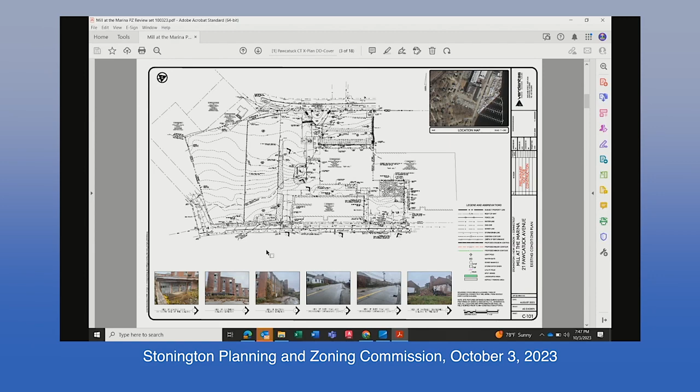So this is just the overall existing conditions plan, with a few pictures highlighting the existing structure. I think the aerials did it justice. But moving on to this proposed site layout.

As I mentioned, one of the big things that changed recently following our last discussion was that we provided the commercial space that Mr. Seeger mentioned, over in this area. This also includes the proposed location for the transformer. We're working with an MEP to coordinate on utilities making their way into the building, but as of now we're looking at our utility rooms being on the lower level over here.

So our utility corridor is going to access through River Road. We're currently working with local utility companies as well as providers to figure out loading and proper sizing of this. That's going to be part of, as Mark mentioned, our site plan review process and application.

This commercial space is also going to utilize the green space in this area to provide stormwater detention, which will further be designed once we get more information about the soil in the area. We're going to do advancement of soil borings, figure out the percolation rates, and determine correct sizing based on the hydrologic soils located in this area. You'll see this is the similar layout to the last presentation.

One thing to note about this area is that this is basically providing a phase 1 and phase 2 of our application. Phase 1 is going to essentially focus strictly on the parking within the actual area. I'd like to go back to the aerial to show this aerial in the bottom right, which shows exactly what I'm mentioning. Our phase 1 parking is going to just utilize this existing area, and then you'll see this landscape portion over here, and this impervious area as well.

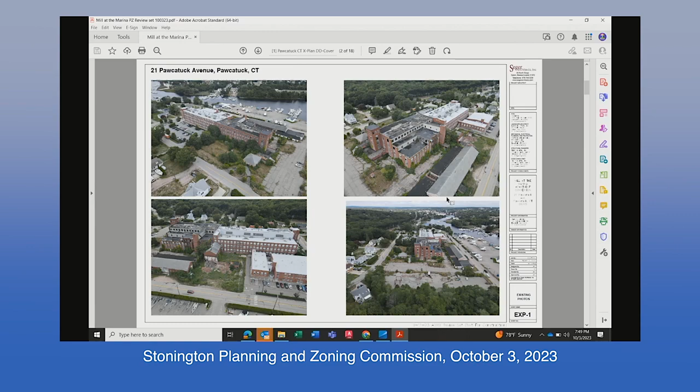That impervious area is going to be designed and presented to the board at a later date, once Jonathan figures out exactly how he's going to proceed moving forward. We're demonstrating what that second phase would be in this plan, just so the commission and the board are in full agreement of what we're actually planning on doing.

We are currently evaluating all the grades at the site. It's a very steep site. I'm not sure if many have been out there, but specifically it's steep along the entrance coming down to River Road, and very steep in this courtyard area. Our landscape architect, Chris McFarland, and I are working on the grades right now to make sure we're able to prepare the site and propose proper grades in this area so that we're able to use all the amenities I'll discuss right now.

So as you can see, I can speak to the landscape side of things, but I am not a landscape architect. Chris is not here today, but if we do have any questions, we'll try to answer them as best as we can. If there are further questions, we can obviously provide responses to the board as needed.

As I mentioned, we're basically providing a walking area along here. This currently is all impervious, all pavement right now, so it's also a benefit in terms of stormwater runoff. The amount of green space we're proposing is greater than what's already there now, so there's going to be a reduction in runoff for stormwater management.

In addition, we're going to better utilize this landscaped area along Pawcatuck Ave. I do want to note this is still subject to change. We are going to be evaluating the soil in this area, so there's potential for some contamination. We're not anticipating contamination up in this area as much because the mill is down gradient. But I do want to mention that all of these proposed site layouts are subject to change following the environmental assessment reporting.

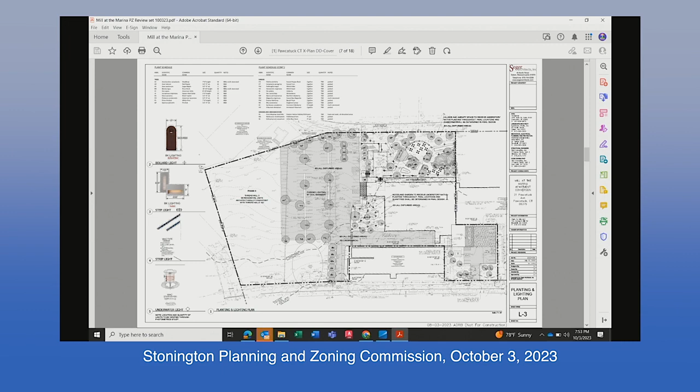These, I believe, are the retaining walls. Again, these are potentially subject to change following the grades being finalized, but Mr. McFarland did provide these details for presentation purposes. And with that, I am going to drop it back over to Mr. Seeger for architectural.

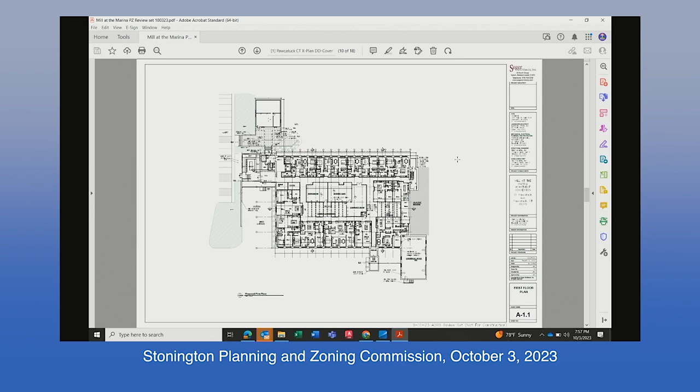We do a number of projects working with Epsilon Historic Tax Consultant, and we go through the process of applying for both federal tax credits as well as state tax credits. So we're familiar with the guidelines. Essentially, they want you to restore the building as best as what the original building was. So that's what we'll be doing with the entire building.

Replacing all the windows, we have to match all the mullions as well as the frames, as well as restoring all the brickwork. But this elevation is facing the marina, or facing the Pawcatuck River, and this is where we're introducing a couple garage doors to get to the parking below. And up top here is the parking lot with a new entrance.

We are proposing sort of a glass atrium entrance to emphasize where people should go. It's a little modern industrial look, sort of a component to the building, one of the few things that we're adding. And then this is the canopy I was talking about that can connect to the single-story building, but more importantly acts sort of as a passage to the Great Lawn, or the landscape amenity space. And this is actually the elevation facing the lawn area.

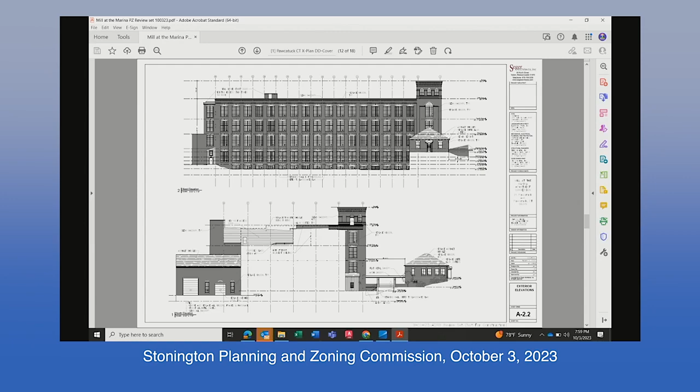And the elevation below here is actually looking south, but this is the existing Thread Mill 1 building in front of us, and we're just showing the commercial space. Again, we have to submit for replacing metal doors and all the brick restoration and window replacement, as well as the roof, for the historic tax credits.

But I think the renderings really tell the biggest picture, you know, as far as, in fact, I could have just shown those tonight and we could have been done. But no, I think it's just really great being able to have a 3D tool.

This view is actually that same view from the photograph of the single-story building and the brick tower. The landscape area would be over here, and the entrance is right there. So this is a straight-on view of the main entrance and the pass-through, and the grade slopes down to the back, to the lower garage area.

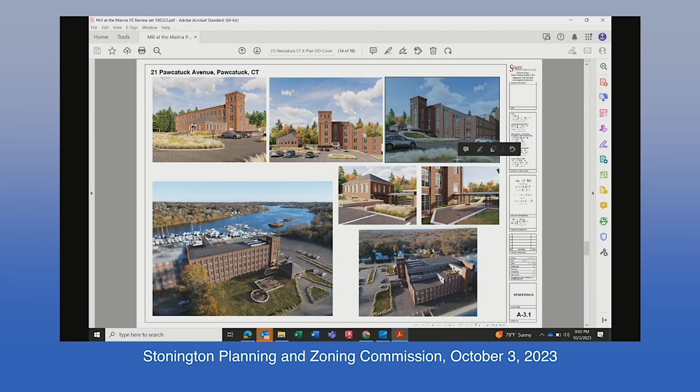But overall, I think this is a really exciting project for us. We have many opportunities with restoring the building and actually providing some good landscaping for the site and for the tenants for the building. I think I can probably pass it off to Mark if you want, or we can open it up for questions.

Pursuant to the chairman's instructions, we want to open it up to questions. I didn't know, for your convenience, if you wanted Mr. DiNardo and Mr. Seeger to sit here so that if you had a specific question, they don't have to come all the way up. Is that okay? Fine with us, make yourselves comfortable. All right, gentlemen, have a seat.

Does the board have any questions of the presenters? Commissioner Philbrick? Thank you.

I'm still confused about Phase 1, Phase 2, Thread Mill 2, Thread Mill 3. If this is a master plan, and you have a big section delineated for Thread Mill 3 in Phase 2, is that a different master plan? Is that incorporated in this? I'm totally confused on the master plan versus all these different phases and thread mills.

Well, like any smart lawyer, I'd defer to the planner first for his explanation before I would weigh in on that, because he addresses that in his report. He points out - oh, I'm sorry, go ahead. Can you clarify that for me, Clifton? I can try my best.

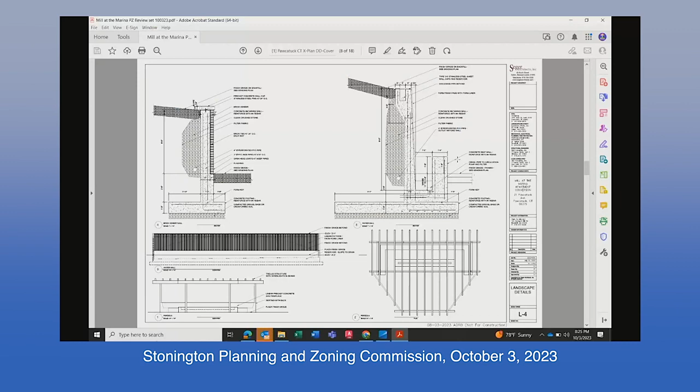We're replacing the windows in their entirety, so that includes the frames, the blocking, all the casing. So you're going to replicate the windows that were there? Yeah, we actually provided a window package for the historic tax credits.

That's Jonathan - that's perfect, that's just what I wanted to see. Yeah, Jonathan went in and had everything documented, so we have to actually replicate them. They're going to be external and internal muntins, the grids and all. Actually, they're metal windows - we're not doing wood windows.

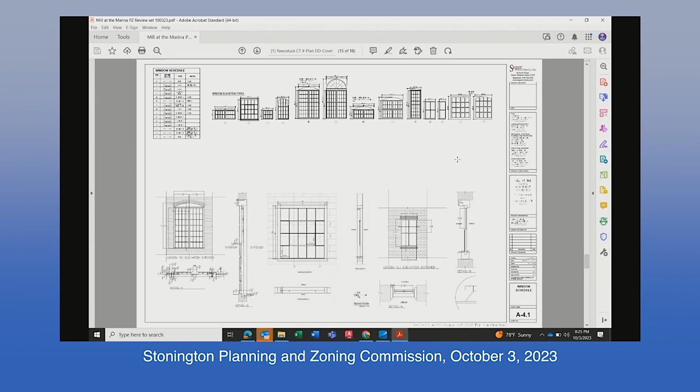The metal windows are allowed because they're painted anyway. Okay, but they're top of the line - even the arches, every type of window we're duplicating. Thank you, that's the extent of my questions.

Gary, any questions? The last time you were here, I think you had mentioned the small parcel or building was owned by someone else. Oh yeah, I wanted to talk about that, if that's okay. If we could put the map showing the site plan again.

When we spoke initially at our workshop - is that this one? Yeah, that's fine. The building that fronts on River Road is owned by the Norwest Marina, which recently changed ownership. So we've been in discussion with them about that building - not very fruitful discussions - but it's also something that they have plans to make improvements to.

Their marina, and those plans are in some fashion going to include that 18,000 square foot warehouse. What they're going to do with it, how they're going to accomplish that, I don't know, but certainly as we present our proposal, it will have some connection with what they will be coming before you with. So you'll have an opportunity to get their input on that. Right now, we don't have any control over it.

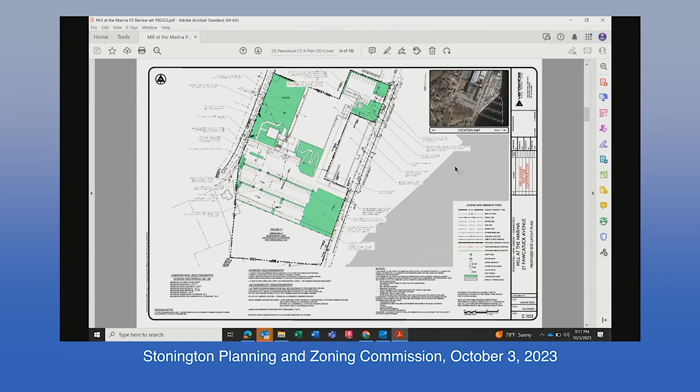Now, my attempt to answer some of the questions. First of all, I think everybody in the room recognizes the history of the building and the abuses that have taken place to the building and also to the town's enforcement. There is currently, as the planner's report notes, a $295,000 blight fine that has been in existence for years. There's currently a lawsuit by the town to assess the damages they incurred securing the building. So I'm not surprised someone had lights flashing into their house. I'm not surprised someone was not being honored by a variance requiring a buffer. It was lawlessness. So when we got involved in the project, we took all of that on, and obviously we took on the mistrust of the neighbors who, like the town, had been subject to this conduct.

So I appreciate and respect the fact that you are well-warranted in your concerns, and that we inherited the predecessor's use and abuse of the property. So with that said, let me try to address some of the questions you raised, particularly Mr. Dottie - you asked about the capacity on the site, and the engineer explained what his findings had been, preliminarily. I personally met with the director of the WPCA, I showed him the plan, and I asked him if he felt there was capacity for this project, and he said yes. He explained to me that in Mystic, they're over capacity.

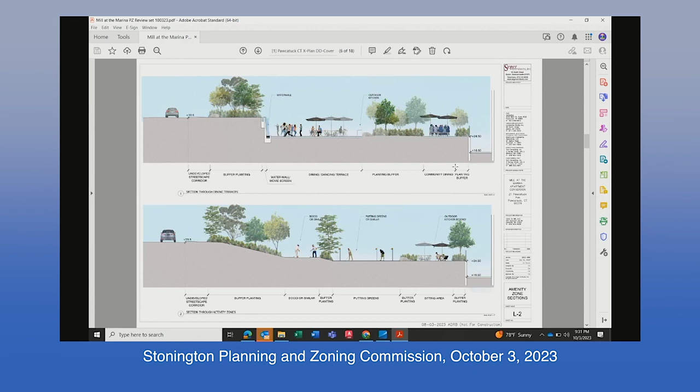Conceptually, on your landscape plan sheet L1, if you wouldn't mind referring to that, it looks like an easement could be made to the town for a future sidewalk north and south of the Norwest Marine Building, such that if that were in place at some point, maybe if you were to buy out the Norwest Marine Building, or the new owners were amicable enough to have an easement on their property, a sidewalk could be stretched on the west side of River Road, all the way across your property and their property.

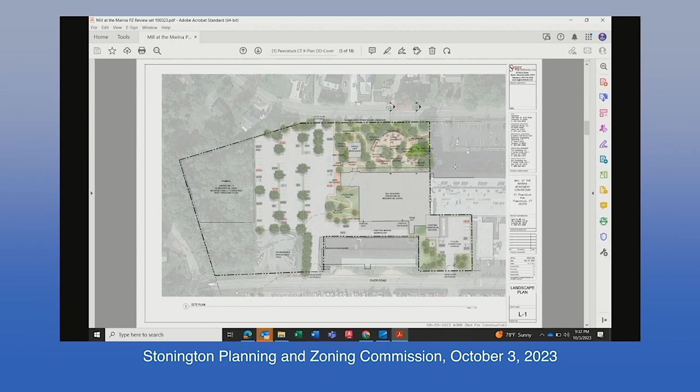So I guess my question is, would you consider - I don't need an answer tonight because we're not supposed to be talking specifics - but please take into consideration an easement for sidewalks on your property on the west side of River Road. Yeah, I think that could certainly be a collaboration between the property owners, and Norwest Marina is going to come before you for something. At that time, you can ask them the very same question. But please take it under consideration.

One last question for you while you're still up there. What is the name of the historical grant that you guys are taking advantage of, which requires the 20% affordable housing? I believe it was a condition of the environmental assessment that was requested. The environmental assessment grant, if I heard Mr. Coggins correctly, has a condition of approval that the site have affordable housing of 20%. And you guys have just completed that application, and so you are now locked into that, regardless of what you would say to us. I think that's an accurate statement. Thank you.

Anything else? Any other questions? Clifton, any other input at all as it relates to this zone change application? Anyone who spoke previously wish to speak again?

Yes, sir. I just have one last question about... Would you speak into the microphone, please? Thank you. Just one last question. The residences, are they going to be owner, condos, or rental units? I think they're rental units, aren't they? Rental units. All of them? All of them. Thank you.